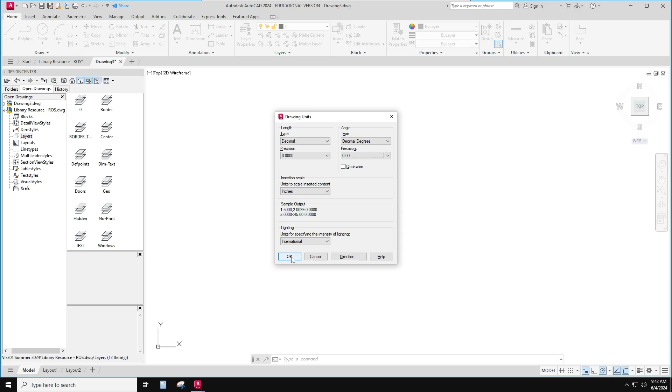There's the plus. I'm going to turn off the grid again. And I have to check units. I always check units. I'm decimal, inches, and I again think I might want more precision in that. Okay, there we go. I'm ready to go.

So now it's draw the assigned mechanical part. Well, first I need to save this. I always forget. There we go. Save as, and this one's called Geneva gear. So there we go, it's my Geneva gear. Now I'm ready to go.

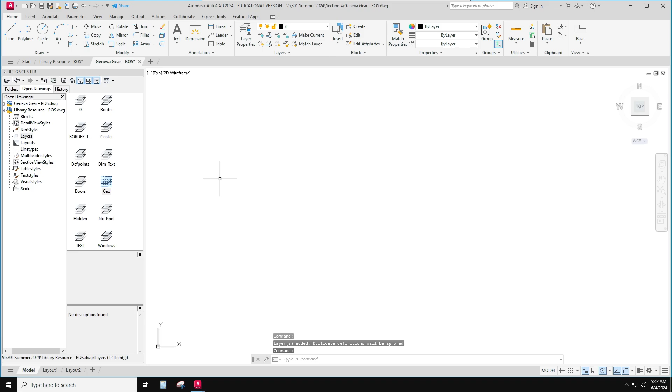So let's get some layers in here. I know I'm going to need the geometry layer. And as I look at it, well, let me bring it in. So here's insert, I'm going to attach it again.

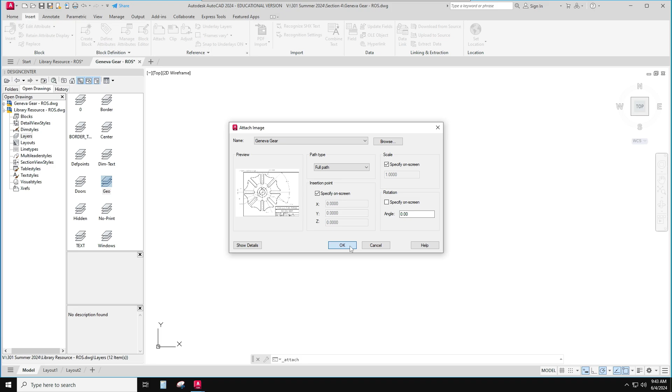Attach my Geneva gear. And I'll just put it in here. There we go. Got it. And so I'm going to need some stuff later on, but I think it's mostly just my geometry layer.

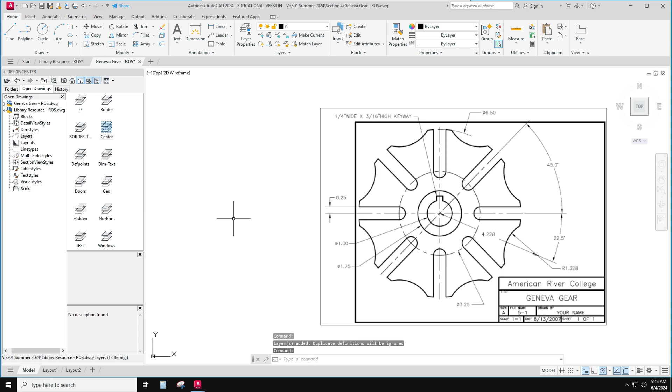So, but I will have to draw some extra little things. So I'm going to bring in geometry, and I'll bring in my center layer again to do some extra little drawing on. So I've got my layers. I'm in model space. I'm ready to draw.

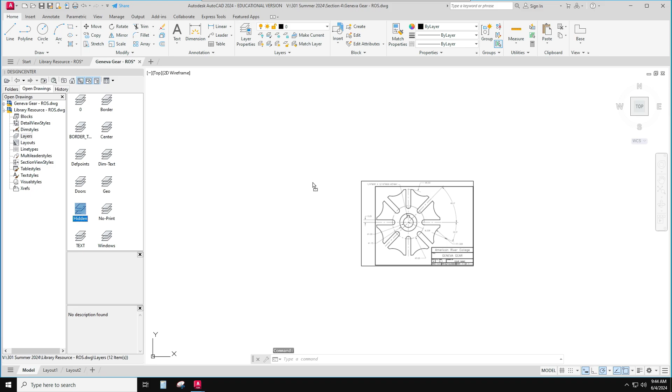I don't think I need the hidden layer for this one, but what the heck, maybe I'll bring it in just in case I need it.

So this is a very interesting drawing. I see the tips are really part of a round circle, and this shape that you see here has been cut out, and this shape has been cut out. So a lot of the dimensions on here are about the cutouts, where they go, and where the other cutouts go and how to make them.

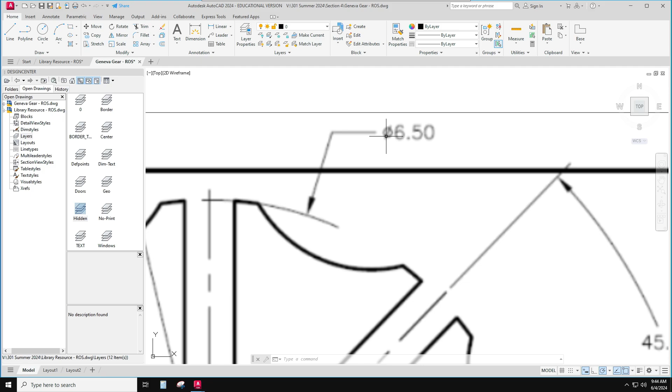So I'm just going to call attention to that. It starts with a big circle. This little symbol here means diameter, so that's the diameter, full circle. This one means radius, that means half of a circle. So I need to just keep aware of those.

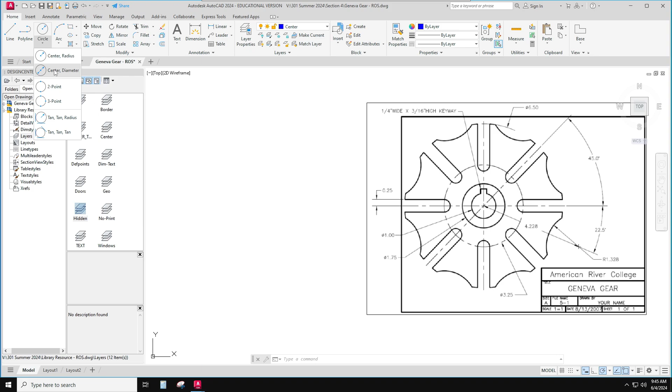So here we go, let's go ahead and start to try to draw this thing. So it starts with a diameter of 6.5, and I'm going to do that circle, center diameter. That's really important. 6.5.

And maybe I need to move this over just a little bit, just so that I've got things as big as I can get them. There we go.

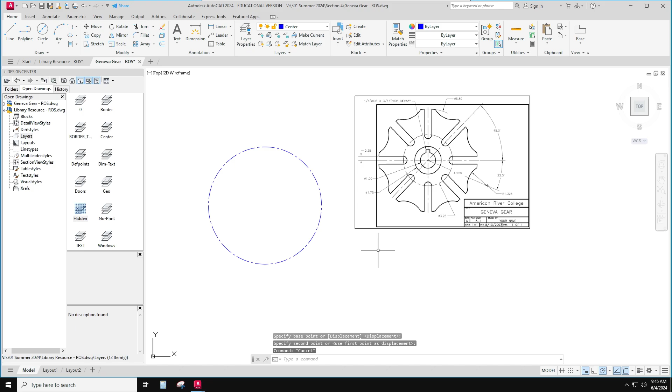And then I know what I'm going to do, I see that this happens over and over and over again. So I'm going to draw this thing, and then I'm going to do a special copy command. I could do copy rotate, but I can also do an array, which will copy it all the way around. So this is the array command, rotating the array.

Okay, so I'm just going to draw one of these. So I'm going to draw this line, and I'll draw this one. And these lines are 45 apart. I'm at 45.

So I can draw a line from the center. Let's see how my OSNAPs. I think my center is on. That'll probably be good. If I touch here, the center shows up. I can draw it as far as I want, but I'll just draw it out to that spot. That seems like a good thing to do.

And then I can draw this shape and this shape. So this one looks like there's sort of a circle. There's a circle there, and that circle has a radius of 0.25, and it lines up on a diameter of 3.25. So here I go again, 3.25.

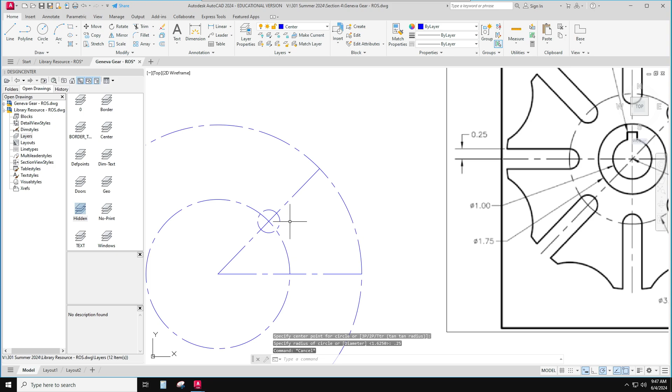Now where those two intersect, this is a cool command. It's offset through a point. I'm going to take that circle of 0.25 and offset it through that intersection.

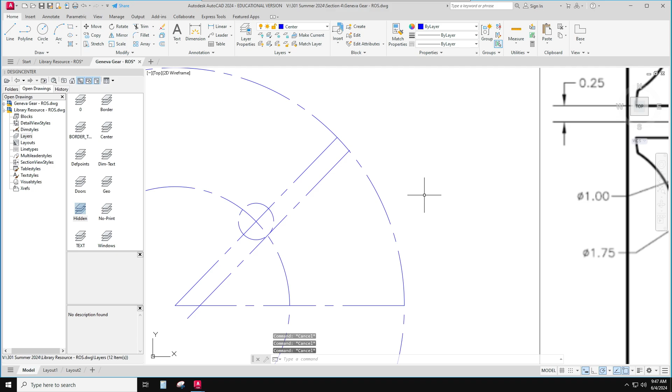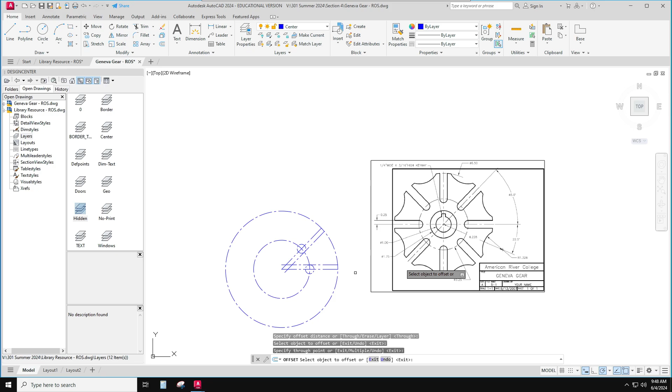Then I'm going to do that same thing down here. I'll do my circle 0.25, and do an offset through that point. See, I just found that line and that line.

Let me trim away what I don't need now. TR for trim. That's kind of cool. Let me trim away — well, I'll leave that part, but let me trim away that and that.

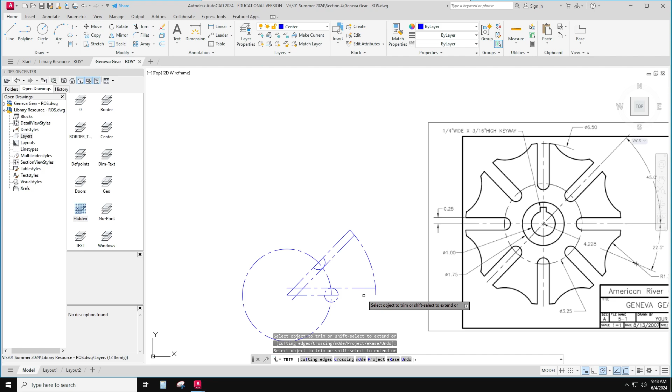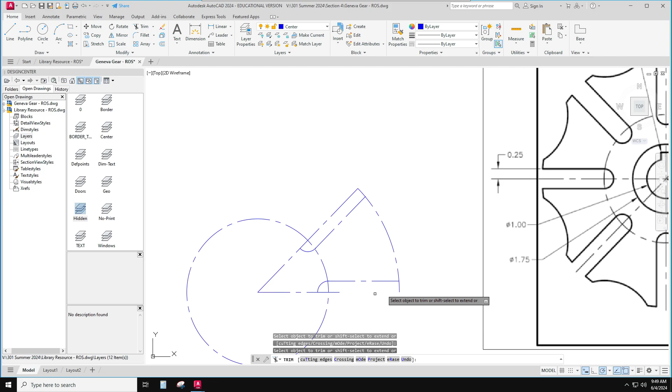Cool, and then I can trim away this part. Do you see how this shape here now looks like this shape? That's kind of cool. If I want to, I can trim away this little part and this little part, just to make it really obvious how it's looking.

There. Now I just need to find this thing. Well, that says it's a circle cut out, and the center of it is 4.228 away on 22.5.

So here we go. I'm going to go from here. Now I need to have this set for 22.5. See, that's a common angle.

And my length is 4.228 along that. And now I have a radius of 1.328. Circle radius from that spot, 1.328 — I'm just typing it in.

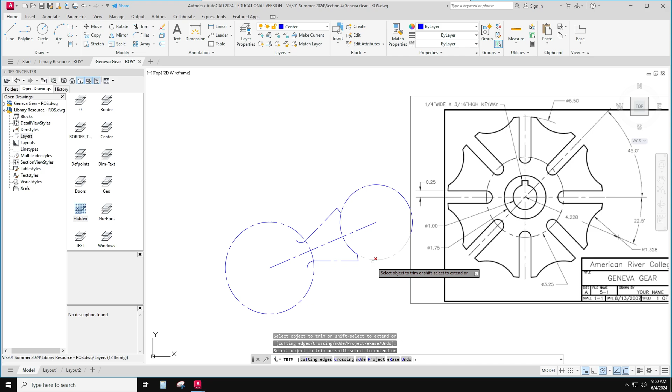Let's put this shape now onto the object, the geometry layer. So I'm going to take those, and I'm just doing my selections in order, and put them onto geometry.

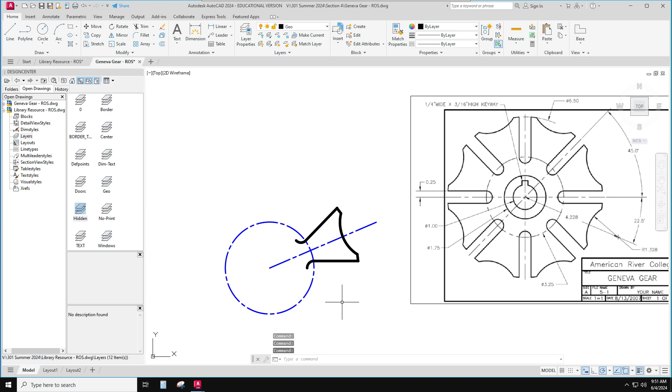If I turn my line weights on, wow, that's cool. I make sure my line weights are set for inches — they are, okay. I did something wrong here, I didn't do a good trim. There we go, just taking care of that.

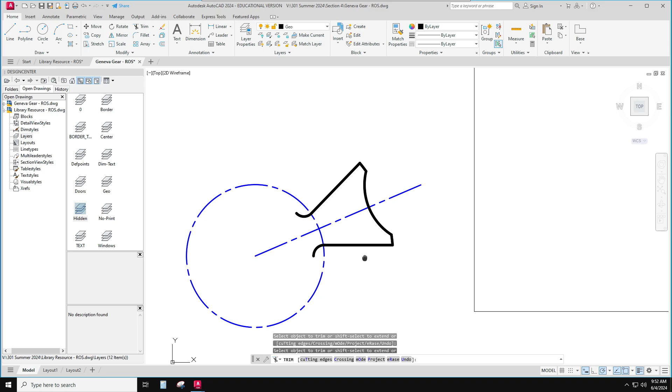Okay, here's the array command, and I see 1, 2, 3, 4, 5, 6, 7, 8 of them. So the array, I'm going to take a polar, that's a round array, select the objects. I'm going to go left to right with my box, so it gets only everything that's all the way inside of it. Select, enter. It says find the center point.

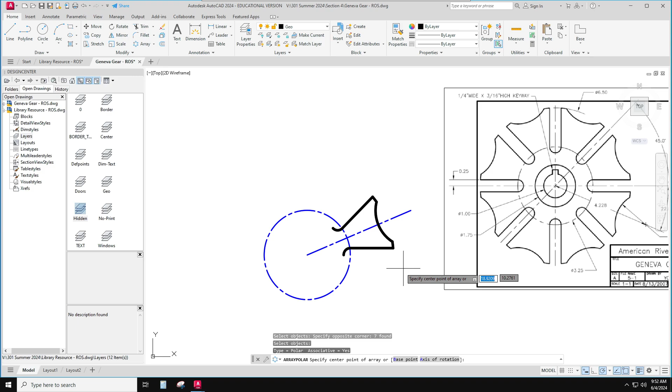It's going to be the center of that thing. And then this whole new thing comes up, and I'll make it 8 of them. And then just click and... look at that. That looks nice. That's so cool.

And then I have a little bit more work to do on my shape. So I see a diameter of 1.75. Let me make sure my circle says diameter, 1.75. And then another one with a diameter of 1.

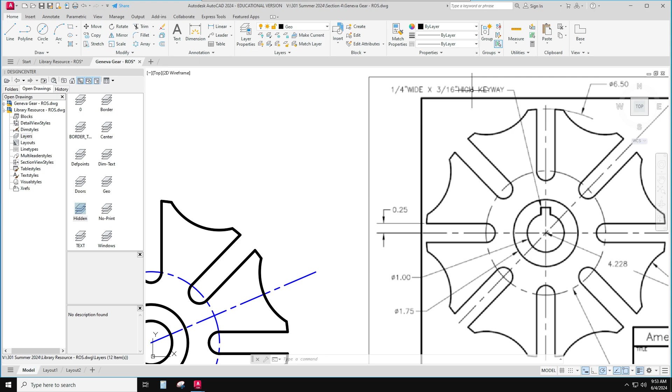Now here's something that's non-standard. This keyway — that is not how you call out a keyway mechanically. But we're going to do what it says rather than follow a special standard. So it's 1/4 wide by 3/16 high.

I can draw just a thing: 1/4 wide, tab, 3/16 inch tall. Watch what I'm going to do. I'm going to go through some steps here.

I'm going to move those so the center — come over to my object snaps and do midpoint. The midpoint is on the quadrant. Let me make sure my quadrant — remember those 4 corners.

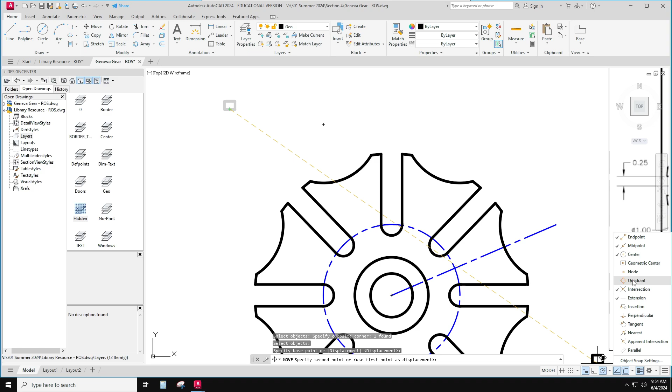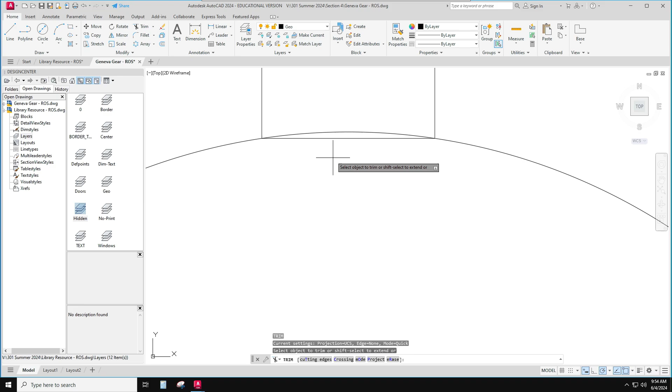And then it doesn't quite match up. Here's where your line weights can be kind of problematic. So now I'm going to move that down so that it hits. I'm going to trim away what I don't want. Now I've got it.

And at this point, I can go ahead and turn off my center lines. There, I've got my cool shape. I should save this before I get going much farther. Save — oh, I'm in the middle of a command. There we go.

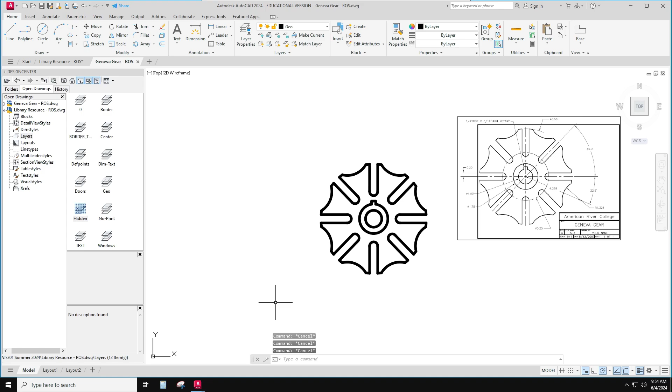Okay, so that's draw your part. Remember, now we're going to apply our other industry standards. So I'm going to need a couple of new layers. I need dim text — hold my left mouse button down — and I need no print. I need some layouts. I need a mechanical B-size layout.

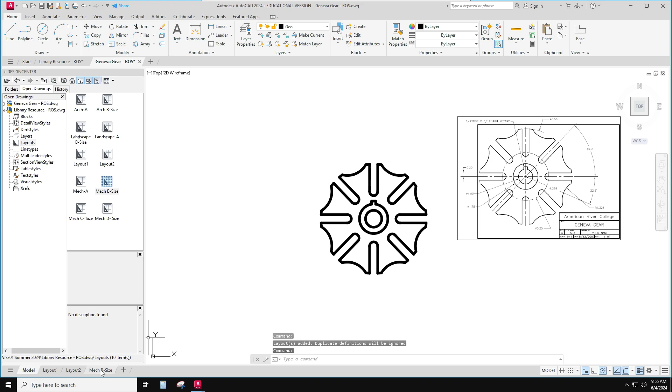When I go to mechanical B-size, I need to make sure I'm on the no print layer. Click my layout button and make a rectangular viewport. Doesn't need to be that big — probably that will be fine.

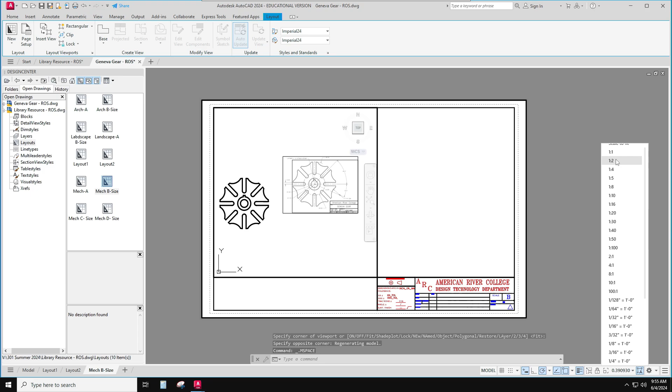Go to my model, make sure it says it's 1:1 probably. Pan it over until it fits nicely. It looks like all my dimensions will fit okay. 1:1, it's centered up nicely. Lock it, go back to my paper.

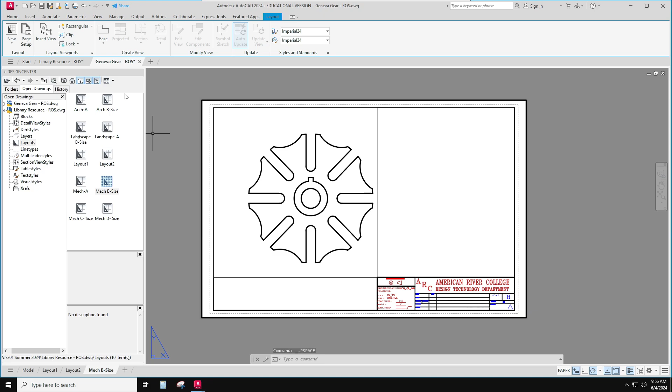Back on the Home tab, go to dim text, and I'm ready to start applying those dimensions. So I need a dim style. Let's take a look and see what dim styles there might be.

I see 2 decimal places, I see 3 decimal places, I see the angles have 1 decimal place. And I see 3, so I need 3 and 2. I need mech XX, and I need mech XXX. And I have to make sure that my angles are matching up with that. So let me go check really quick.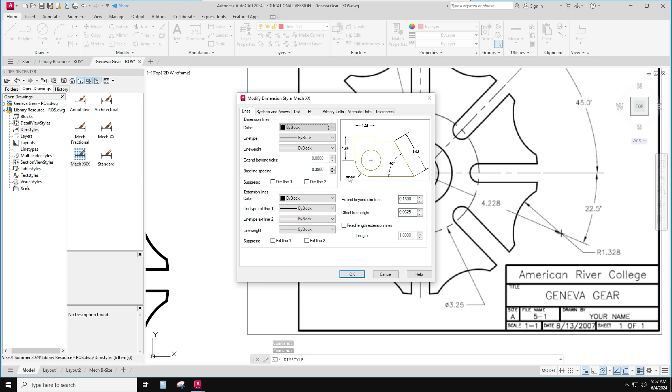If I do one of those angles on, say, mech XX, let me look and see how it's going to come out. It's only going to have 1 decimal place. So I need to change it to, or 0 decimal places—I need to change it to 1 decimal place. Then I'll be able to do those.

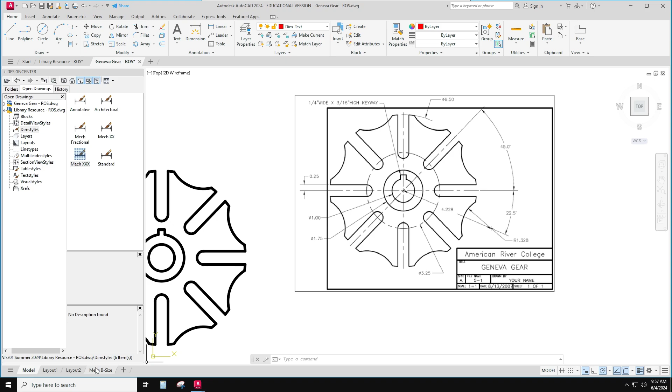Now it doesn't have to look exactly like this, but I can do that. I'm going to put a center mark right there. That's the first thing I'm going to do. That shows up on your annotate button. Center mark. Click—isn't that cool? Now that's a pretty big center mark. So I see that I was on standard.

Let's go ahead and set myself up on mech XX. Center mark. So if I want to change that so that it's not as big, I'd have to go in and change that from a big center mark—well, that should be putting a small one in there.

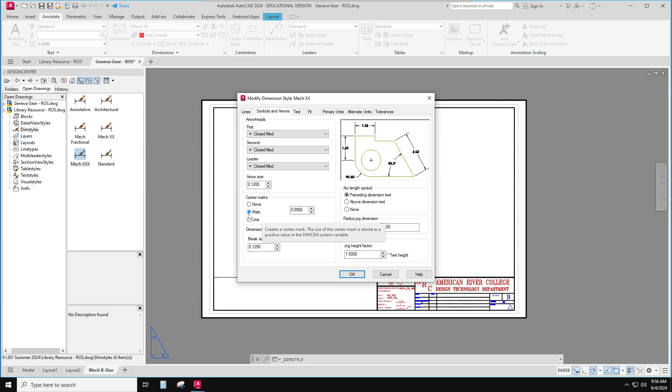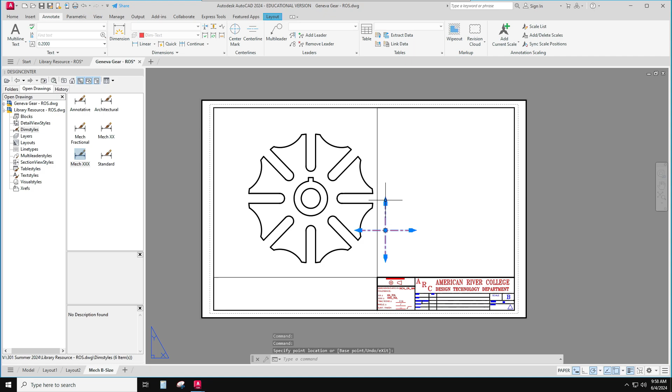So I'll go ahead and just dimension that. I'll just bring those down, I just want them smaller. I'm going to explode that. Take those away.

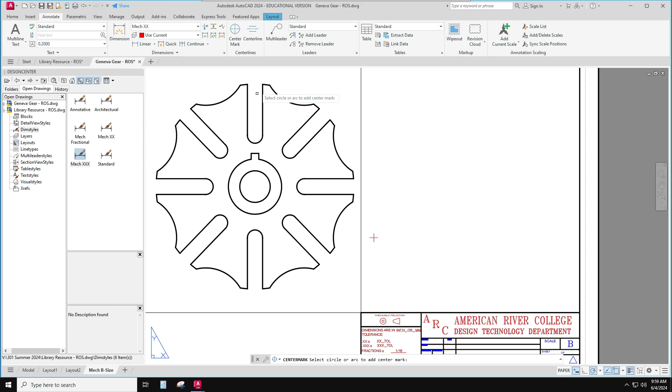But now I can center mark one of these. That's kind of cool. Now look at how some of my dimensions come out. This first dimension is called aligned, and it goes from that center to that, and it says 4.23.

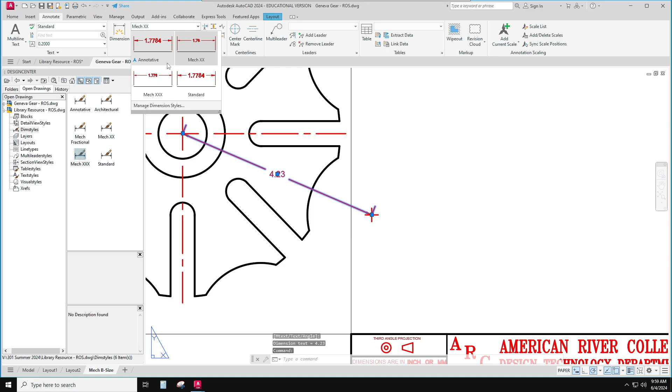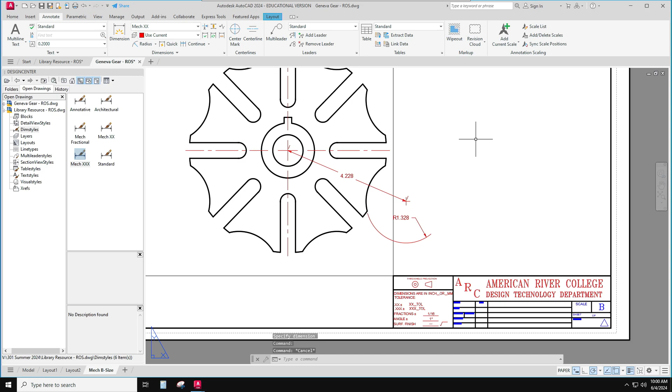That should be on mech XXX, 4.228. And then when you put your radius dimension on here, it doesn't quite look the same, but that is how you do it. And that one should also be on 3 decimal places. Isn't that cool how you can do that?

Now the rest of them, I think, are pretty well set. Okay, so I can do a center mark here. Oh, let me do another cool one. Okay, I'm going to now put a line—check this one out. Shift right click, midpoint between 2 points.

From a space, midpoint between these two, to a space, midpoint between those two. Isn't that cool? So now I can put my 45-degree angle on here, and I can put my 22.5 degree angle here.

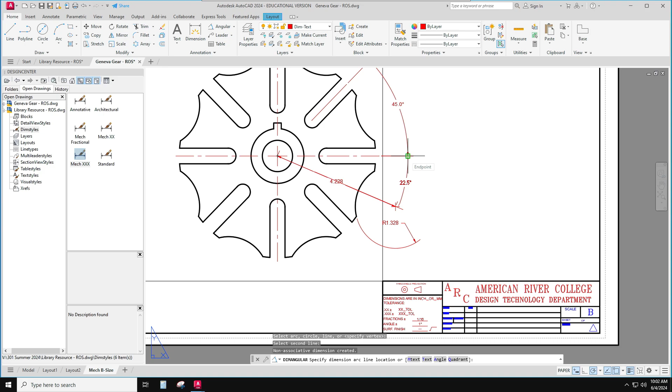May need an actual line there, so it needs a small little line for me to actually go to. Let me just put a small line right there. Okay, so there I've got—you can see I'm getting most of it generated now.

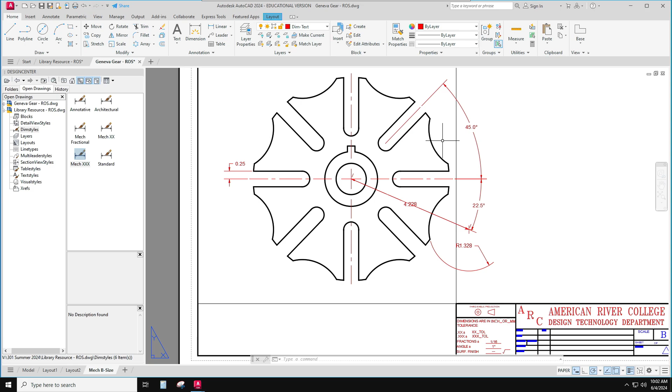This one is linear from here to here. So those are all getting set up. Okay, might need to move this one to be a little bit more standardized. Let's put this one about here. There, it's actually more of a standard type thing. Let's move this one out a little bit, move this one out to match.

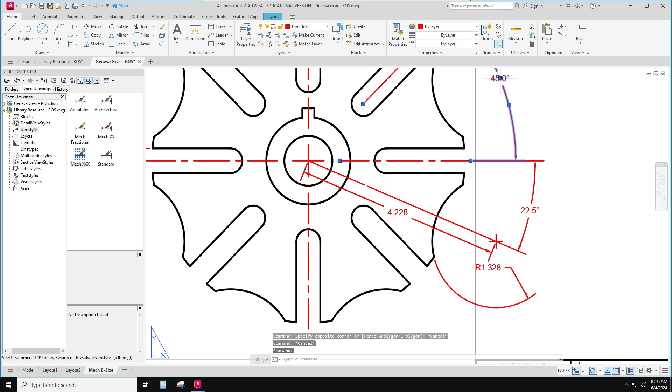And now it's cleaning up. All right, and then you can get all the rest of them on. Remember, I want you to go to the blocks and put in the general notes, left click. Drop your general notes in, and there you go. That's it, that's your Geneva gear drawing.

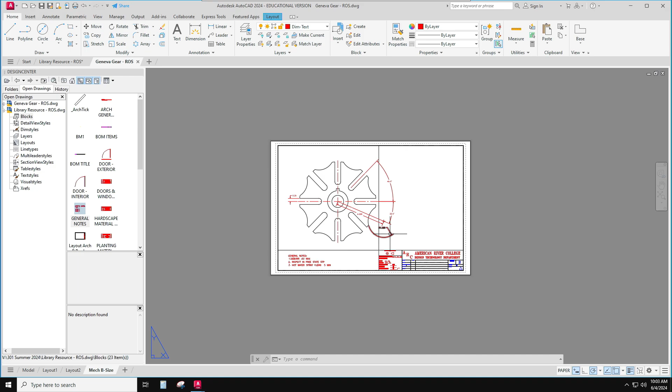You have to finish up all the rest of the dimensions, but I think I've got all the ones that look just a little bit different than the old style that our original plate was.